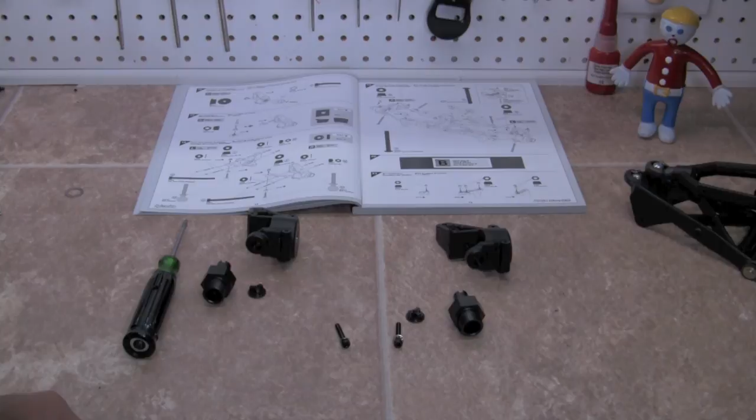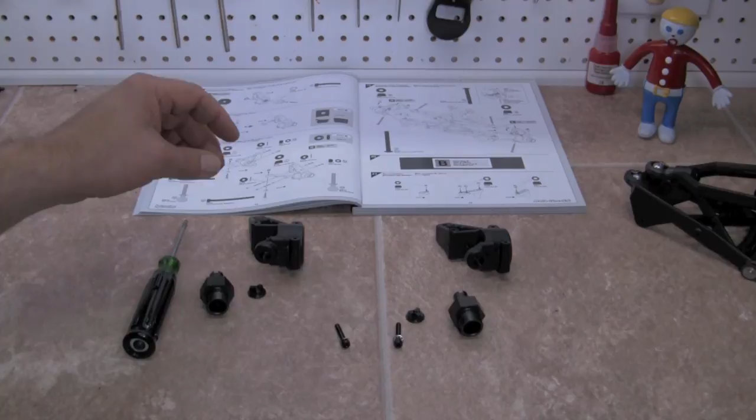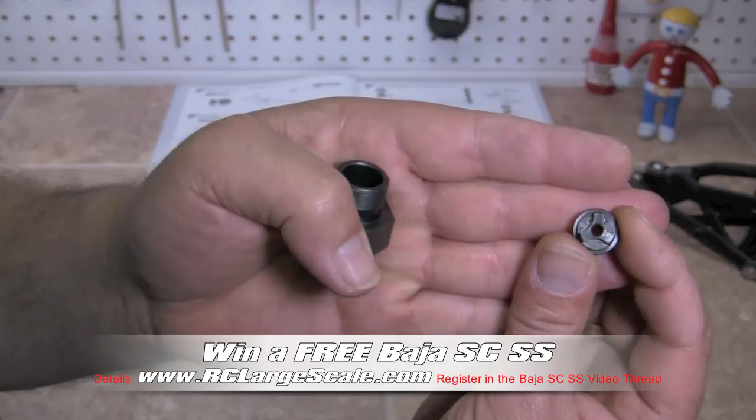Number 16, we're going to install the front axles onto the front hubs. Very straightforward, a new design over the last version. You'll see that the back spacer has a little triangle pattern on it, and that same triangle pattern is in the back of the axle, so they fit together.

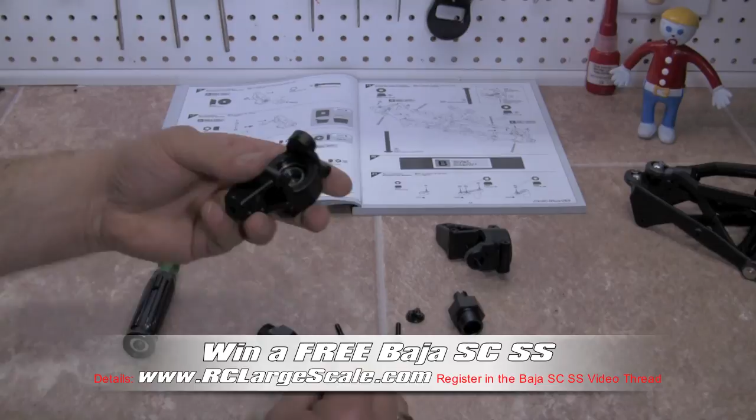And get screwed on. To put them in, grab one of your hubs. We're going to take the small spacer and drop it into the inside of the bearing, then put your finger on it and turn the hub over. Take your axle and drop it down in and spin it until it falls in.

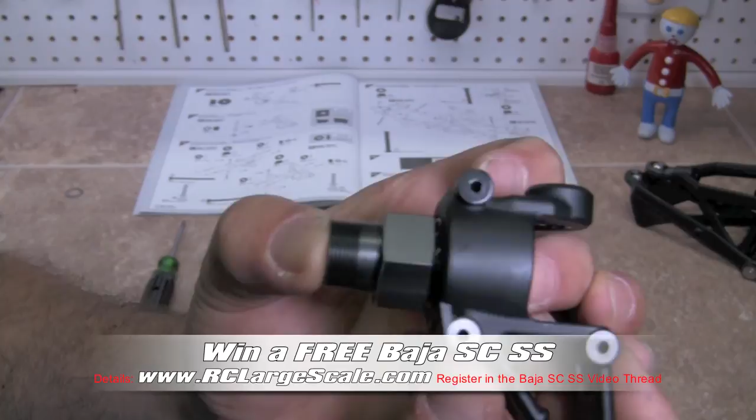Hold your thumb on this portion and your finger in the back, and we're going to check the play. We'll get close up here and you can see there's a large amount of play in that axle. This is an optional step, but we're going to go ahead and shim that out.

We're going to use the Team FastEddy Pro Series shim kit. Again, this is optional, but there are 3 different thicknesses, and we'll use one or more shims of different thicknesses to take a majority of that play out. I say majority because you never want it too tight - you always want just a little bit of play in there, because heat can expand the metal and you don't want it to bind up.

So we've slipped a shim over the axle here. We're going to drop it in just like we did before and test it. There should just be a tiny bit of play - there we go, just a tiny bit in there. That's how we shim out the front hub, if you choose to do so.

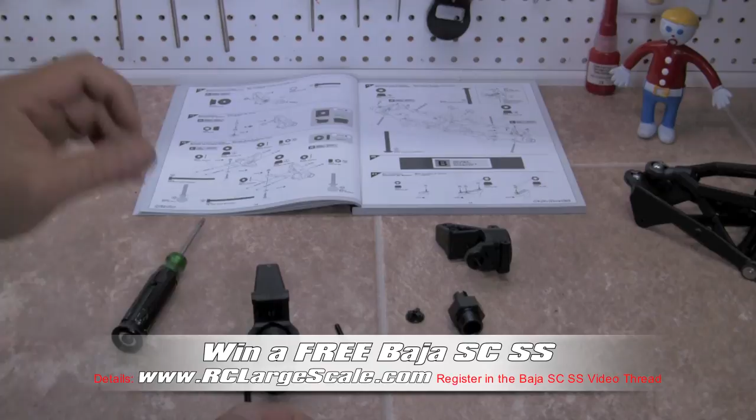And we highly suggest it. Now we need to put a screw in, and it's going to go in from the front. You're going to want to grab the appropriate screw and also put a lock washer on there. Seeing as how this is a metal to metal connection, we're going to use a little bit of Loctite on the end of the screw.

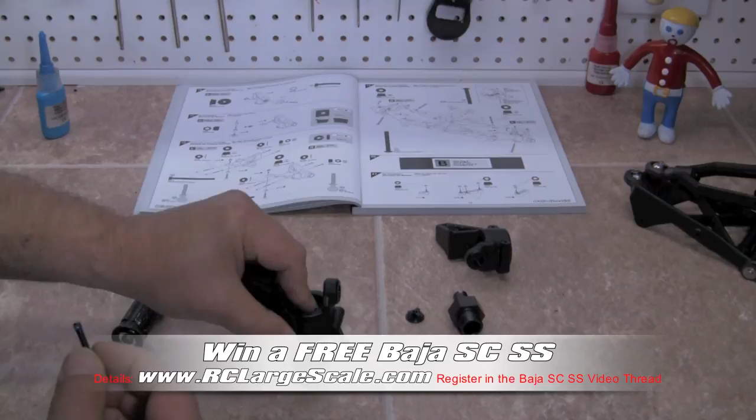Again, you're going to hold the assembly together so it doesn't fall apart when you pick it up. Make sure that it's all properly set in there, drop the screw down in and tighten her up.

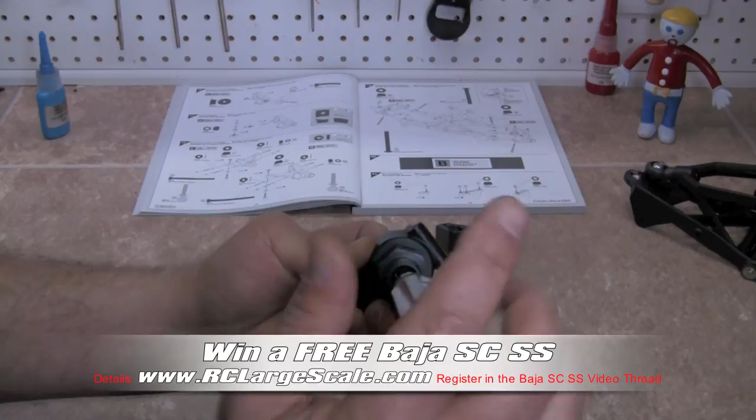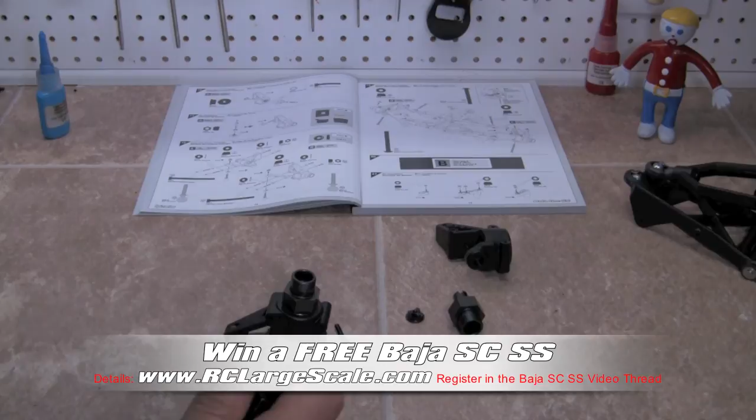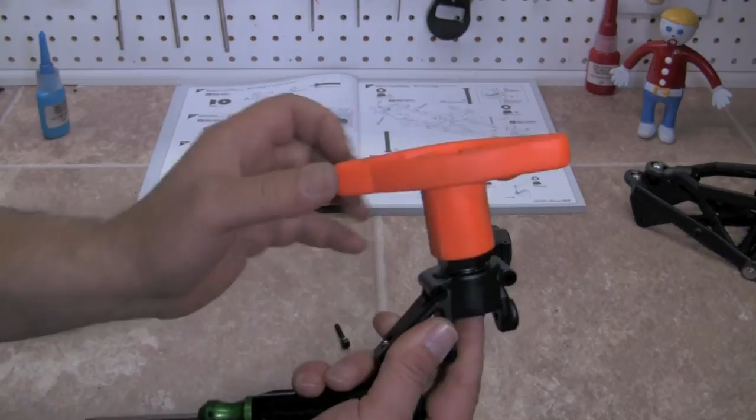You're only going to be able to get so much torque on there, and you do need to tighten it down. So at this point, grab our wheel wrench that came with your kit. We're going to set it down on top of the axle so that it captures the hex nut, then stick the driver down inside and tighten it up a little bit more. You don't want to strip it out, but you don't want it to be loose.

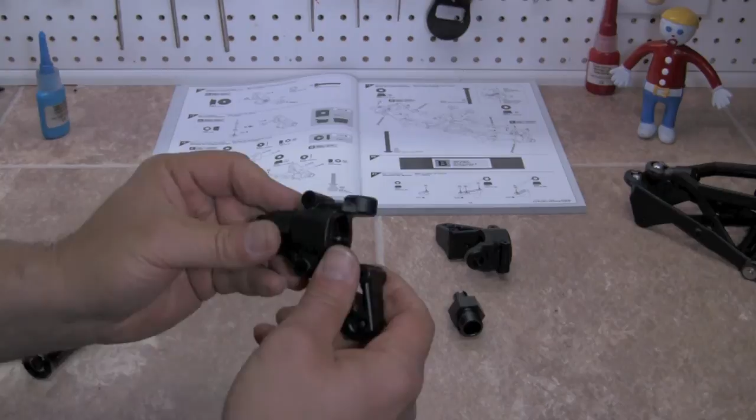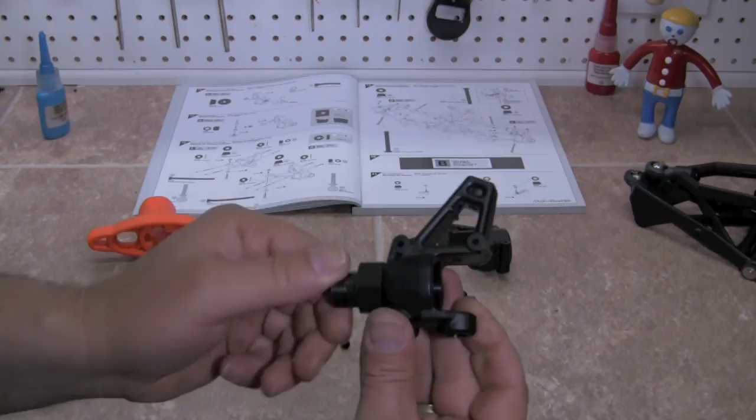After it's tightened down, you're going to want to check the play to make sure you didn't over shim it, if you did shim them up, and they should turn freely. Very straightforward. We're going to go ahead and do the same on the second unit off camera, and then move on to the next step.

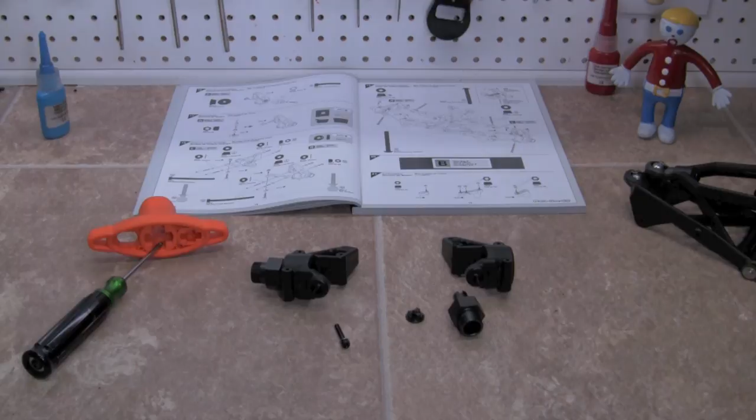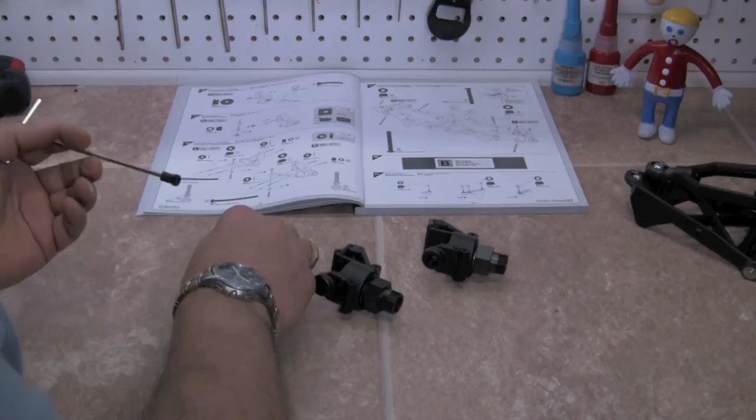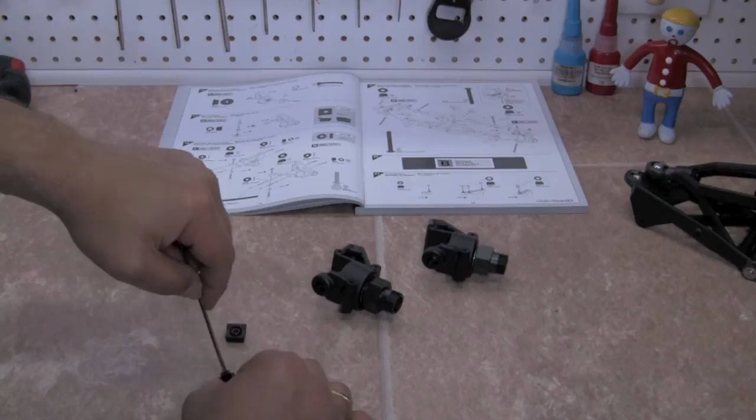We're going to breeze right through step number 17 here. Get out your nut installation tool, and we are going to install nuts into the 85-422 nut keepers. We'll show you what this is all about in just a second. So let's go ahead and put our nut in there and repeat that for both of them - I've already pre-installed one of them here.

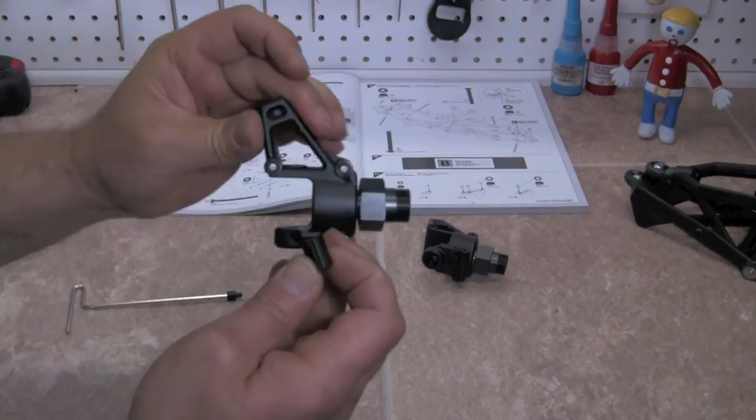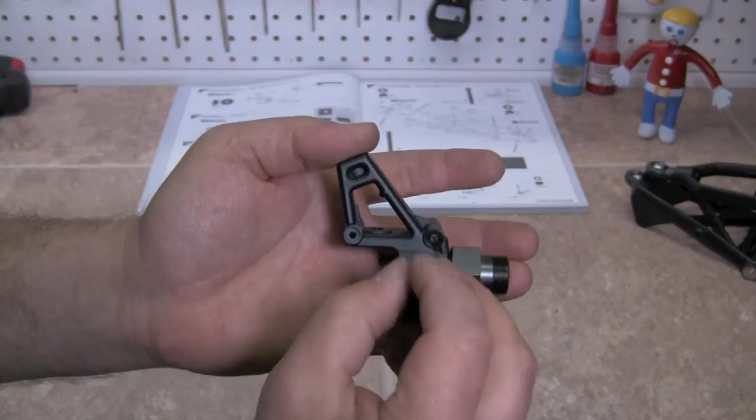These serve as a holder to hold the nut into the hub. So as you hold the hub in this direction, there's a little nub that's inside here. Let's go ahead and position the little nut holder like so, and it just slides right in. You're going to center it, and that just retains that nut inside. Pretty interesting design, but it works.

So we're going to hold this forward, put the little point forward, and slide it right in. Let's go ahead and get our products laid out for step number 18, and we'll have some more fun.

On to step number 18. We've got a lot going on here. There's not really that many parts and pieces, but you do have to be very careful and pay particular attention to the direction that pieces are going on.

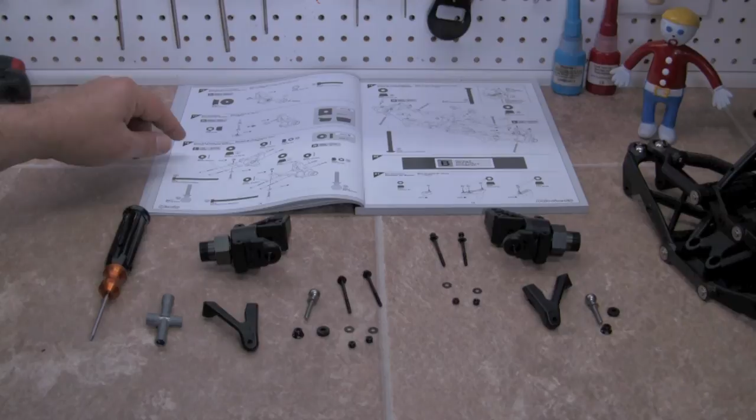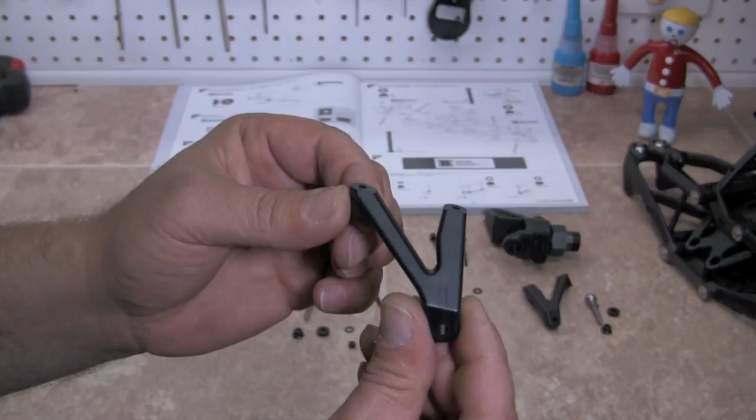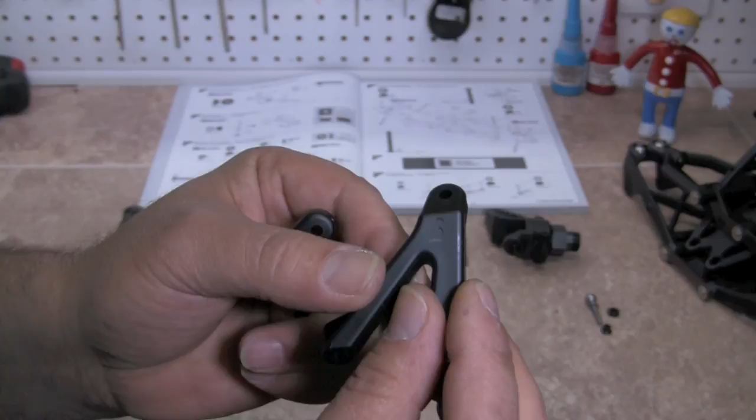The little arms, if you take a look at your part number 85408-4, the picture is very deceptive. This is what it looks like. There's a part number 3 and a part number 4. When I took them off of the tree, I inscribed a little 4 on the one that was part 4, and a little 3 on the one that was part 3, because they're not universal. You have to make sure that you get the right ones on the right side.

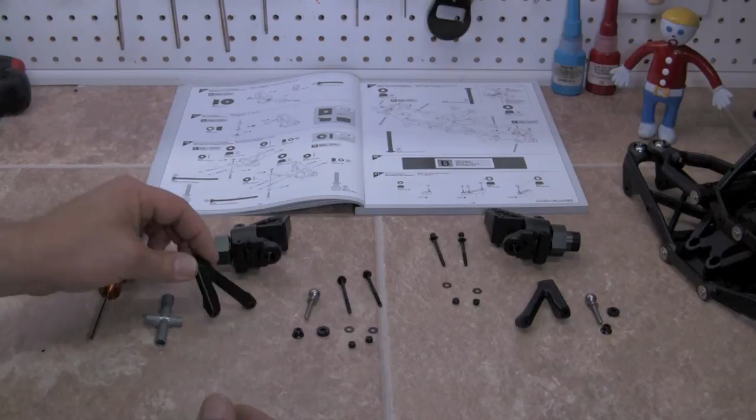We're going to go ahead and mount these up. It's fairly straightforward. First thing you're going to want to do is get your long, thin screws and put a washer on there, just like it shows in the directions, and do that on both of them.

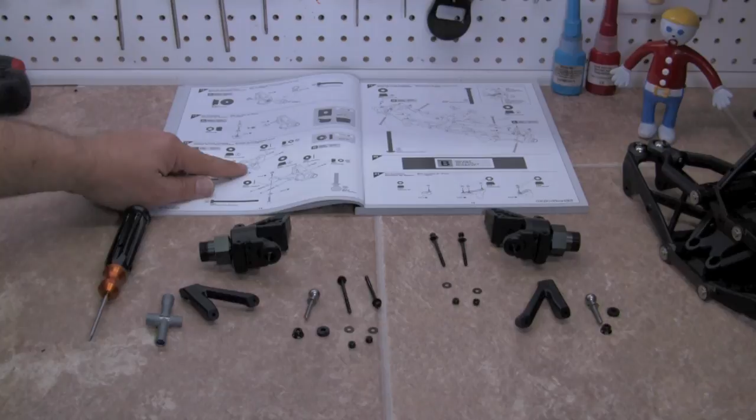We're going to hold and take a look at the directions on the left unit, and point it just like it's oriented in the manual. Then we're going to take our part number 4 that we inscribed the 4 on, and install this. There's several different ways that it can go on, and we need to make sure that we get it on in the proper direction. This is how it's going to go.

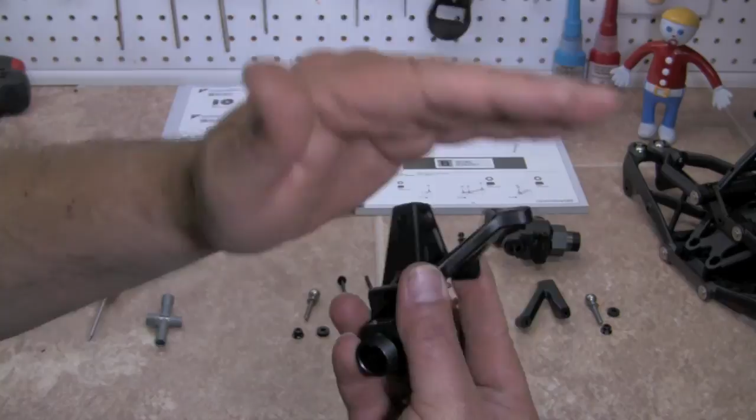The way that I remember is that the angle points up, and also if you look at it, this is angled back and this is angled back. This is square and this is square. So that's how they're going to go on.

And we'll take one of the screws. We're going to go ahead and drop it in and go all the way through. We'll do the same with our second one. That's how it's going to look. Going to use our fingers, hold the screws in, and put a washer and a nut on each one.

Teeny tiny little suckers. Hard to grab off the table. Da-da-da. Okay. Got those on. Maybe. Little sucker wants to cross thread. There we go. Got that on.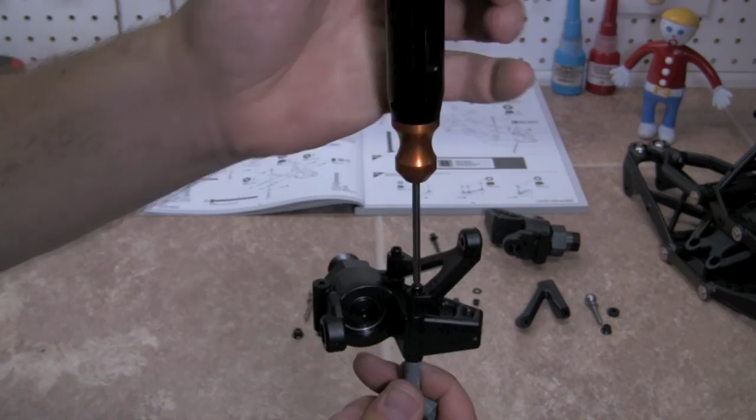We're going to use our little mini tool here to tighten these down. Going to go ahead and repeat the process the same way on the other side. So we're just going to build one here. Go ahead and tighten those down. Ooh, nice catch. So that's how it's going to look at this point.

And match it up against the photo in the directions, just to make sure you're doing it the right way. I may be doing it wrong, I don't know. We'll find out sooner or later.

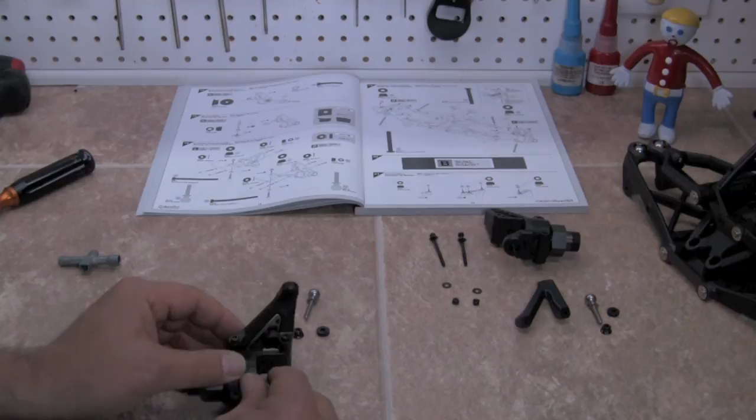Alright, now we're going to put the ball stud on. And the ball stud, first thing we're going to do is find part number 85422, which is a 3mm spacer. It's on the same tree that you got these little nut holders off of.

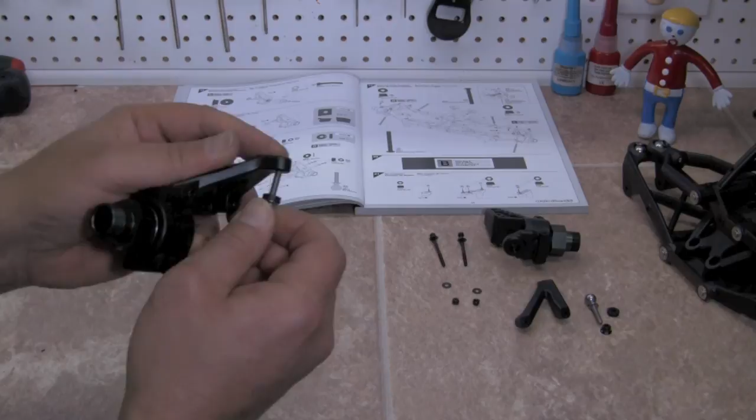We're going to go ahead and slide that spacer onto the ball, and the ball is going to go in from the bottom up in, and we're going to follow it up with the flanged nut. It's got a flange on there. And then tighten that down.

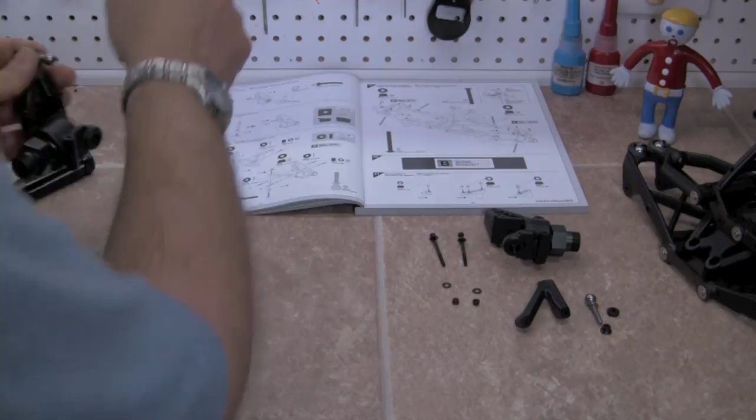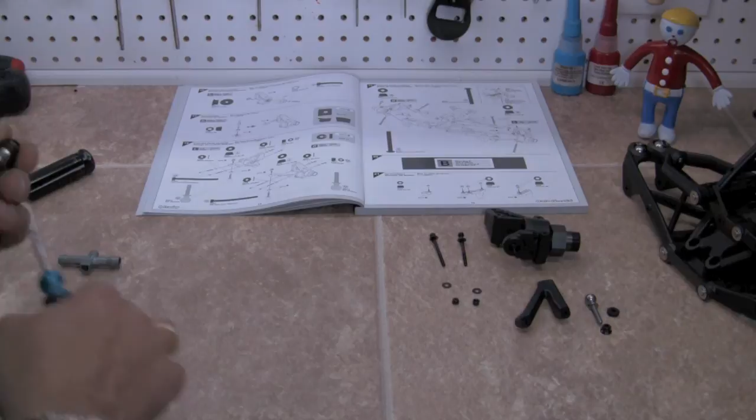Boy, I am just grabbing the wrong wrench all day. That's not going to work either. Where's my wrench? Yeah, there we go. We'll just use the one on the drill. That'll work.

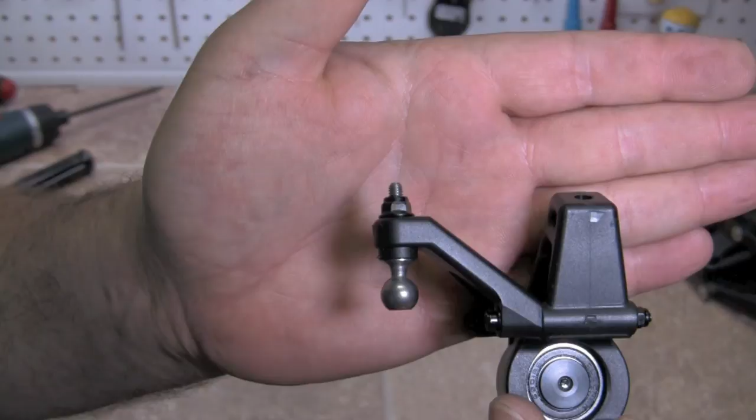Okay, going to go ahead and repeat that same process on the other side. You can see how the spacer is on there in the flanged nut. And then don't forget to use your washers on both the inside and the outside on both of the through bolts. That's how your wheel hub is going to look.

I'm going to turn off the camera and build the right unit, and we'll be back to start on number 19.